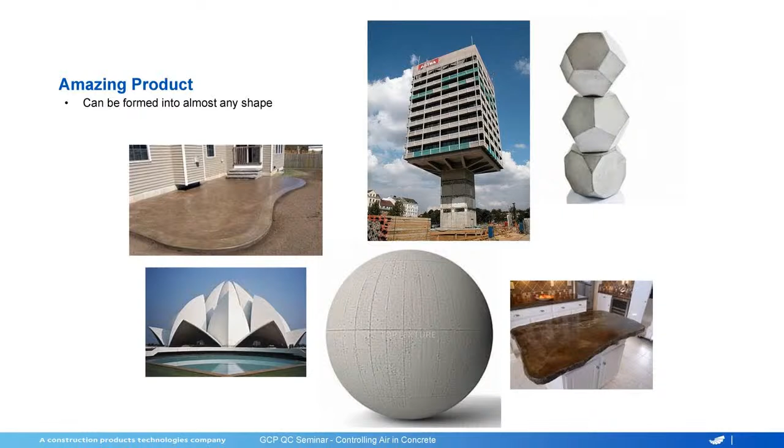So it's an amazing product, amazing material. We can do a lot with it. And part of that is to make it durable. So why do we want air entrained concrete? It's for durability. So how do we get that?

Well, we have to start with good aggregates - and again, good doesn't necessarily mean good for entraining air. Durable aggregates is maybe a better word to use. We're going to have portland cement, and a number of other pozzolans that could be available, and we're seeing more of those on the market. Some of you may have gone to IL Cement recently, and that's offered some other challenges with entraining air and keeping air. And then we have the water, and of course our source of surfactants.

We don't use Joy dishwashing liquid, but they are similar families.

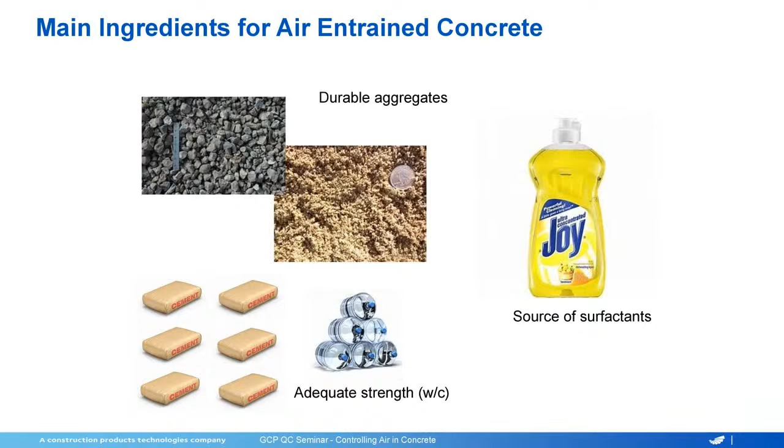So one thing about air entrainment - it's not a foaming agent. If you put air entrainment into your concrete, you're not getting air until you mix that concrete. We're going to talk a little bit about mixers and how they impact the air, but if we don't mix it, we're not getting it. Just like when you wash dishes at home, you put the Joy into the sink with water, and until you get some agitation, until you stir the water, you don't get the foam. It's the same with air entrainment - you have to have mixing.

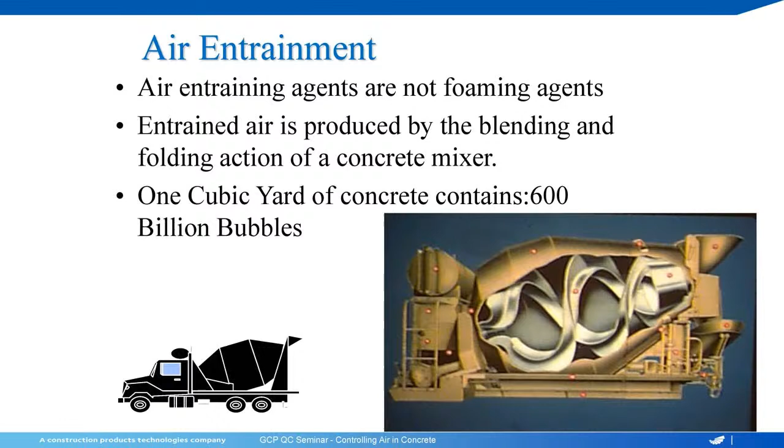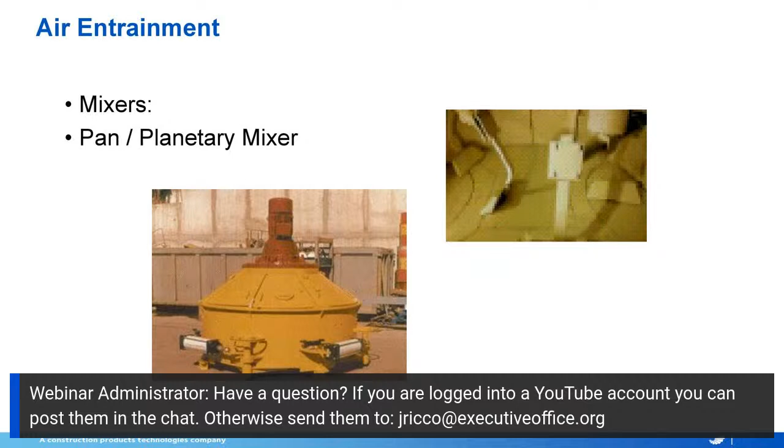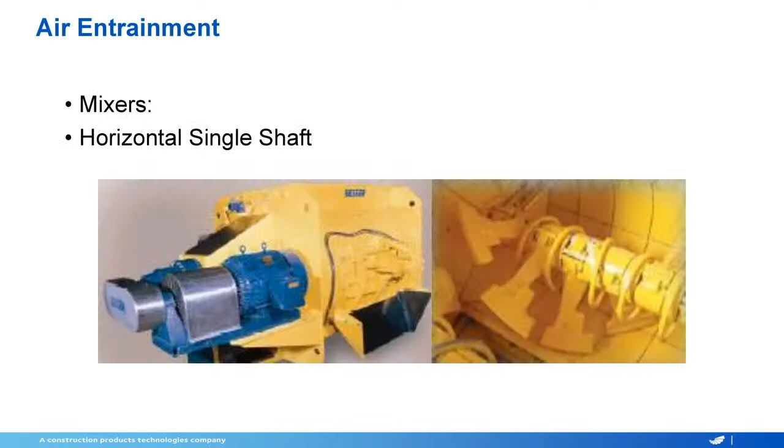So there are a number of different mixers that we can use. Some of you guys use the drum mixers, which are stationary. Some use ready mix trucks to move the concrete out to the forms. We have planetary mixers, we have pan mixers, we have these ribbon mixers - I don't see as much of these anymore as I used to. We have the single shaft and the twin shaft mixers.

And all of these will take the same materials, same amounts of material, same amount of air entraining agent, and give you different air contents. And that's just because the mixing action is different. For example, it would typically take more air in a pan mixer to get the air you need than it would in a twin shaft mixer or a drum mixer, just because the mixing action is different.

So if you change mixers, be prepared to do some testing with the air. If you get a new mixer, get a new liner, install new blades - any of those things are going to impact the air. If you have buildup on the mixer, if you have worn blades, if you have gaps between the blades and the body of the mixer, all those things are going to play a huge role in how much air you get and how long it takes to get there.

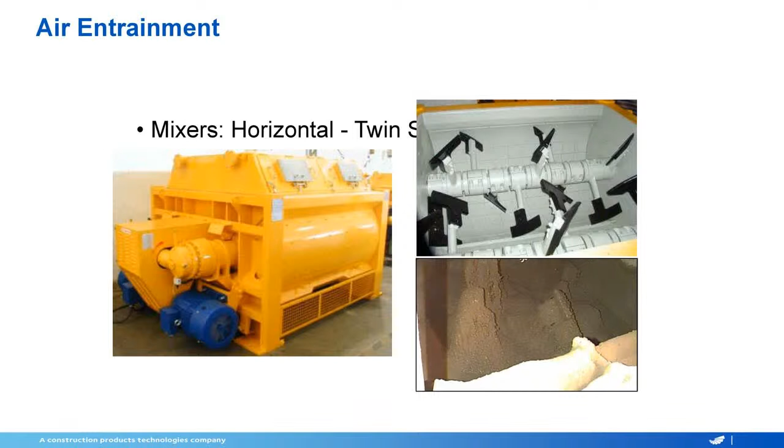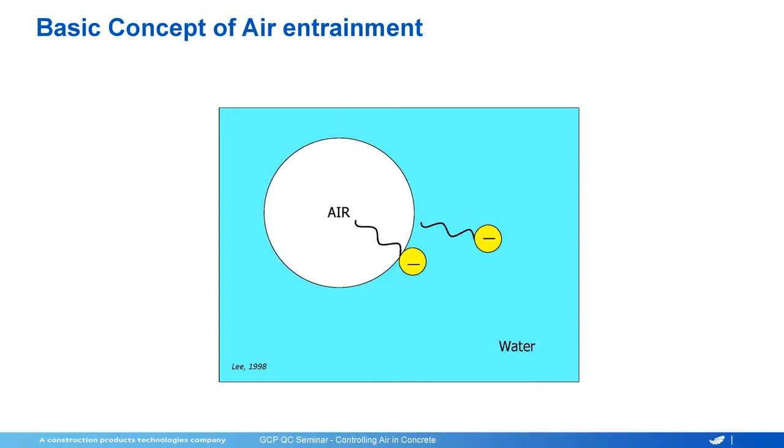So air entraining agents, they're pretty simple materials. They really do one thing, and that's take the bubbles that are created when you're mixing the concrete, and they turn those bubbles, those bigger bubbles, into well-spaced small bubbles. And the reason they do that is you have one end of that surfactant that likes water, and you have another end that doesn't like water. So what happens is you get the tail sticking into the air, the head sticking into the water, and that makes that bubble much tougher than the bubble that would be there without the air entrainment.

So when you mix concrete, you're always generating some air. That air is mostly going to go away as soon as you stop mixing. When you put the air entrainment in there, it stabilizes those bubbles that are created during mixing, and they don't go away. Now some of them will obviously dissipate over time - the bigger bubbles will tend to come out quickly, and we're going to talk about that a little more later.

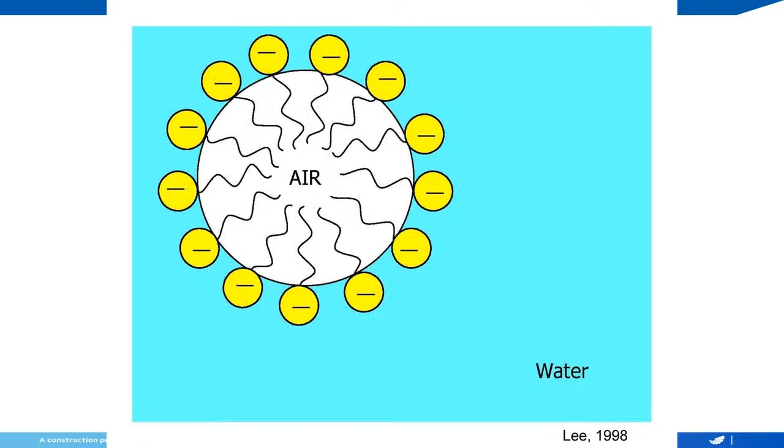So then you'll see, again, we're getting more of these molecules around this bubble. We're getting more bubbles - I'm going to go through this fairly quickly. And then you'll see that you'll get the aggregate. You have the cement.

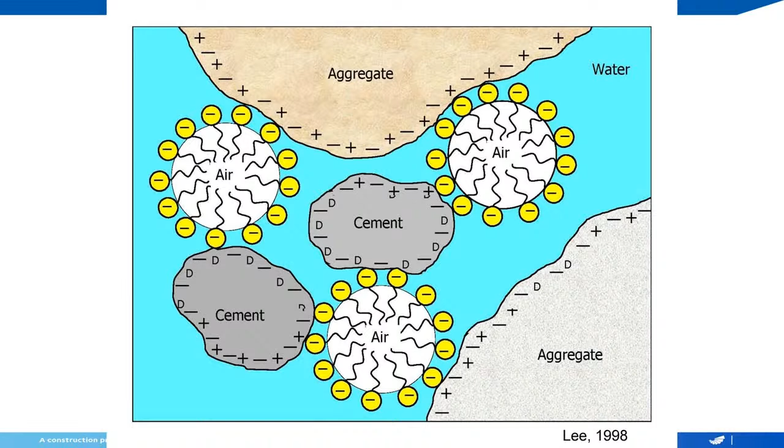And then you've got the water, you've got all these materials, and air needs a really stable home life. So for air to survive, for the air to build and then to stay stable, it needs a stable home life. And we'll talk more about individual aggregate materials later, but that whole mortar phase of the mix, that material passing the number 8, that's where the air lives, and in particular those areas between the 30 and the 100 sieve. So we need that material in there to give that air a stable place to live. The other thing that impacts that, again, that we'll talk about later, is the rheology of this mix. And I'm sure some of you are doing self-consolidating concrete, and that presents its own set of challenges.

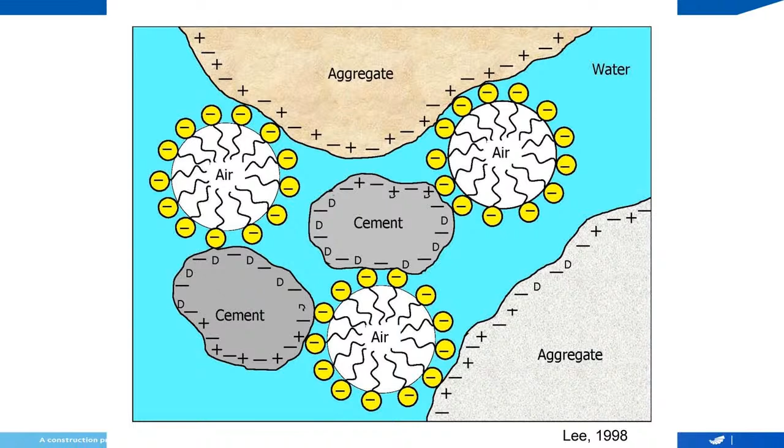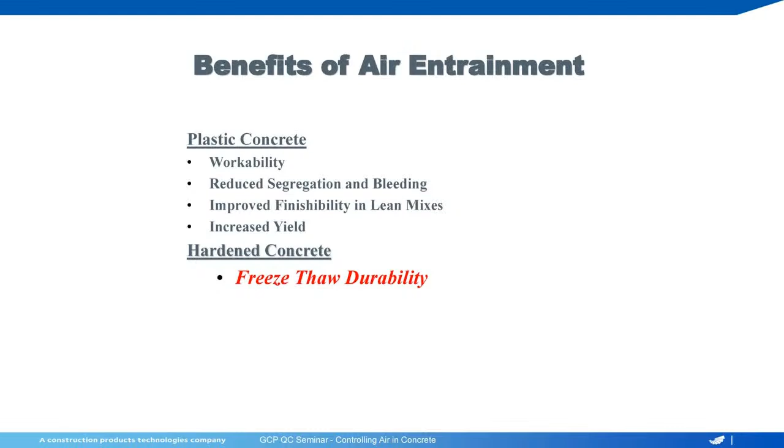Okay, so benefits of air - obviously workability is a side benefit of that. You can get less segregation and less bleeding with air because those channels are now disconnected because you've got the air bubbles in between, so that water's got to work harder to bleed out. You do get better finishability with low powder content mixes. If you have high powder content mixes, a lot of air can cause it to behave a little bit sticky. Of course, we get more yield out of the same batch of concrete when you have air in it. And then the main reason we use air is for freeze-thaw durability.

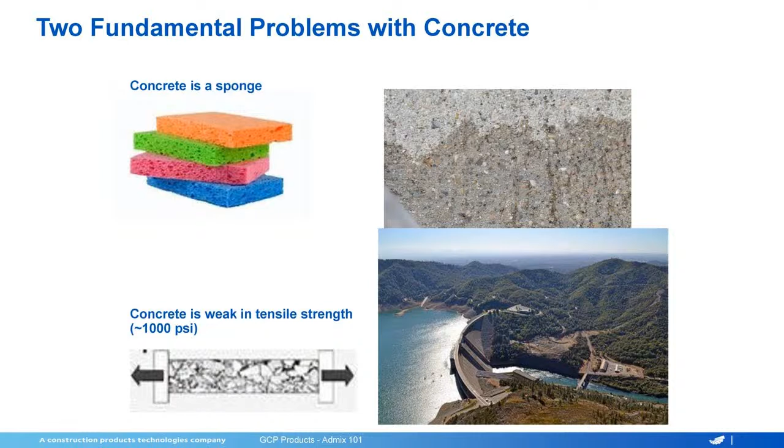Okay, so concrete is a great product, as we mentioned. However, it is a sponge. It is not waterproof unless you do something to make it so. And it's also weak in tensile strength. So we have a material that will absorb water, allow water in. It's weak in tensile strength.

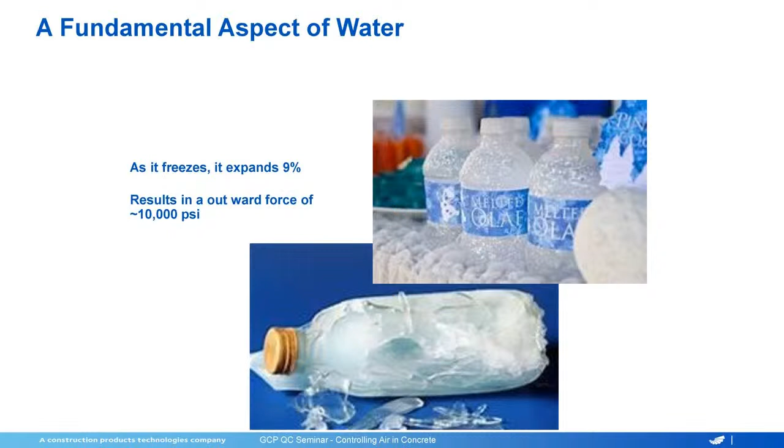And then, as we all know, water expands when it freezes, and it expands about 9%. So it's going to grow, and the outward force is at about 10,000 PSI. So it's a lot of force. And again, that's internal, so it's tensile. So our concrete is not able to withstand that. So the concrete gets wet. It can take it for a little while, but after repeated cycles of freezing and thawing, it will fail if it's not properly air entrained. And there's some other things that go into freeze-thaw durability that we're not going to spend a lot of time on here today.

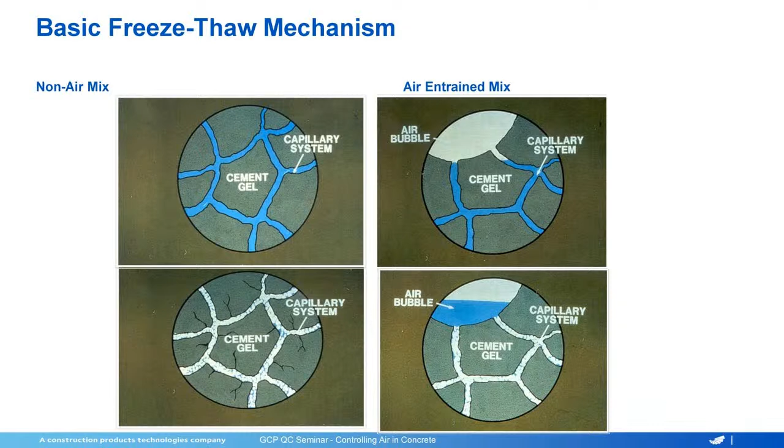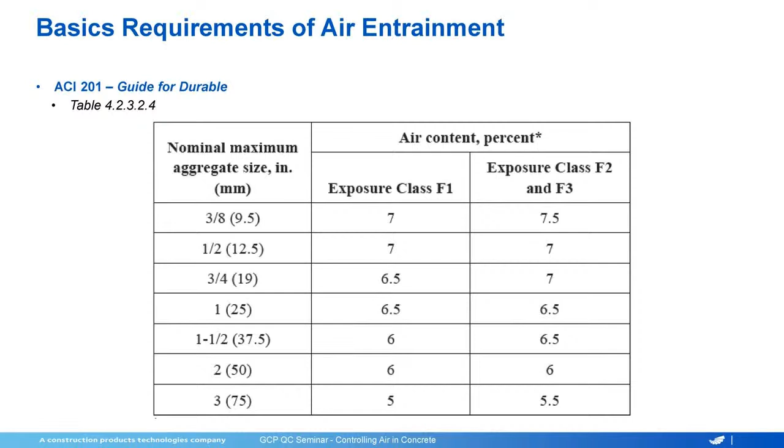Again, air entrainment's been around since the 1930s, discovered accidentally by a forerunner to the GCP business in Cambridge, Mass. Okay, air entrainment - now this is out of ACI. You will see not just this specification, but engineers will write their own specifications, and it may or may not coincide with this. But essentially, as you get lower in aggregate size, you're going to need more air for protection. And it's not just the percentage of air, it's the size of the air, and we're going to get into that as well.

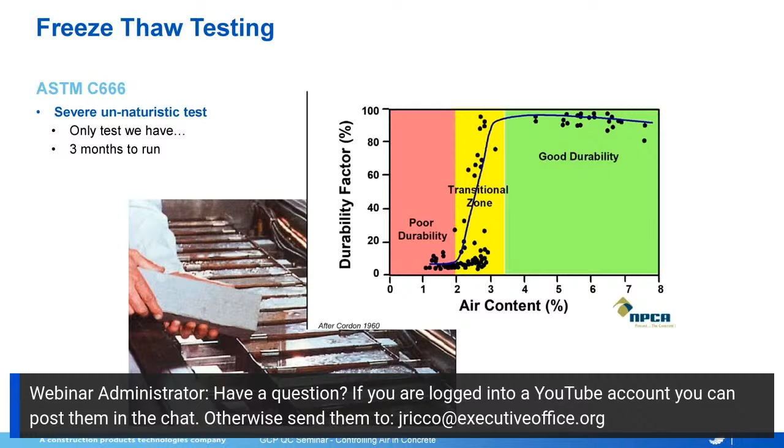So C666 is a very severe test, but it's the only test we have. It takes about 90 days to run because you're cycling through 300 cycles of freezing and thawing. What you'll see is air content's low, and you're almost always going to fail freeze thaw. However, with some very good concrete mixes and very good air systems, we can see good durable concrete at 3% air. We've seen some of that - very low water cement ratio mixes with some very good 3% air can survive that. Don't see that often. Typically what we're looking for is up in that 4+% with low water cement ratio as well.

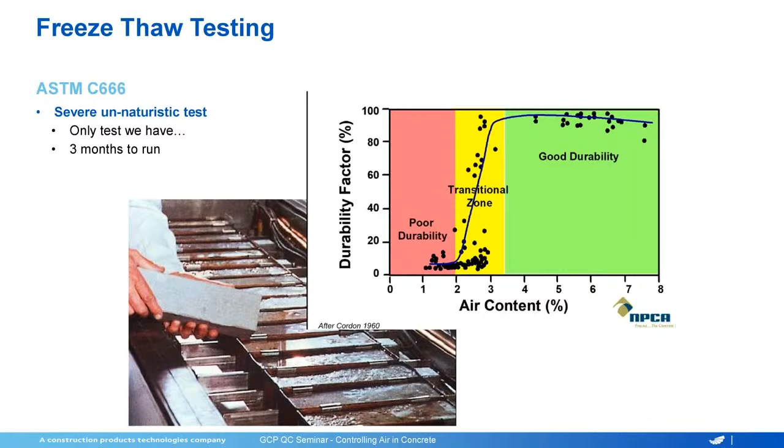Test for air entrainment - now I'm going to get on a hobby horse here for a bit. The chase indicator is not a test. However, if you are having difficulty having consistent air entrainment, it is a good tool to use to do a quick test on each batch that you make. Very simple test to run. It will give you an indication of what the air is. Obviously, you're only testing the mortar in this test, so it's not going to give you as accurate a reading as the roller meter or the pressure meter, but it is a really good test to run.

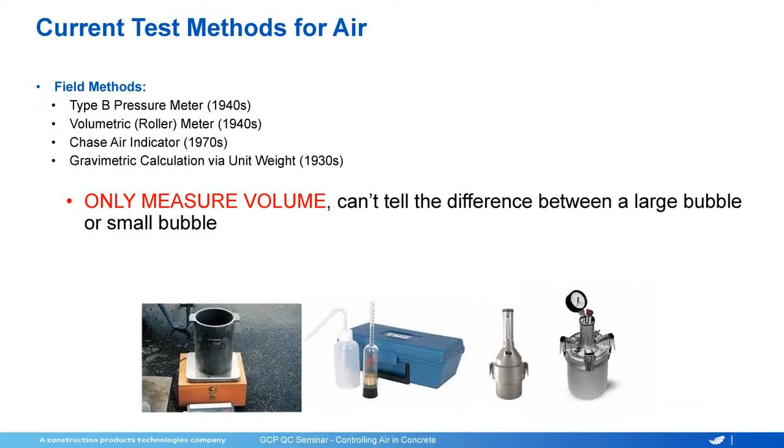And this only tells you the air content - it doesn't tell you whether it's a large bubble or a small bubble. The other thing I would suggest is that anytime you're doing any testing, run the unit weight. If you have the air content and the unit weight, you can learn a lot about your mix, whether you're having trouble with air or not. So it's my suggestion that you always run unit weight when you're testing concrete.

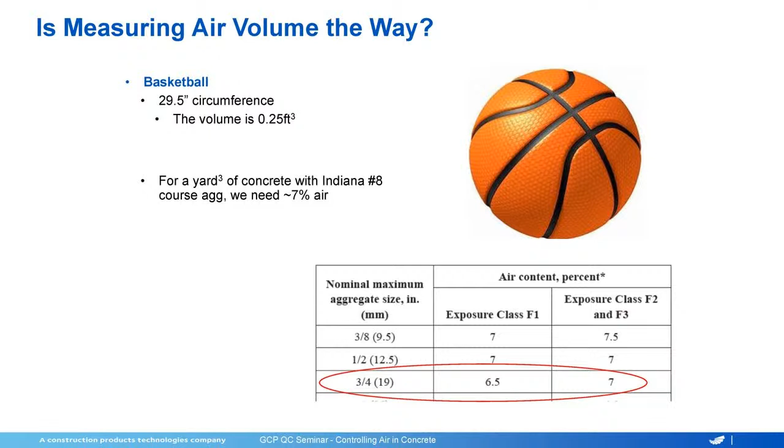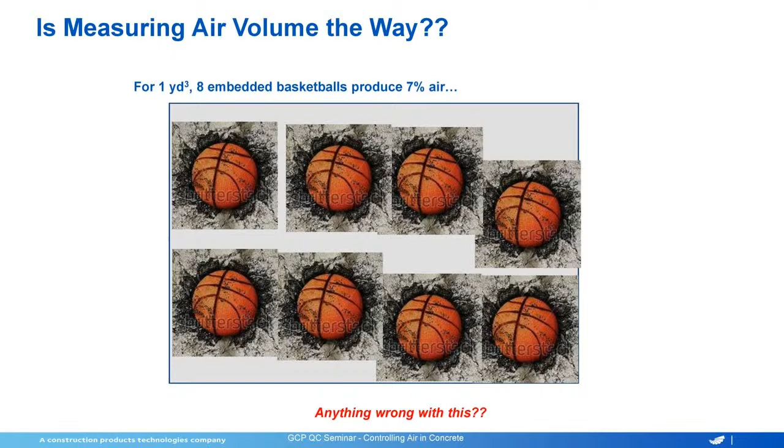Okay, so air voids - if we have a basketball and we need 7% air, a basketball's air volume is about 0.25 cubic feet. So in this example, if I need 7% air, I can put about 8 basketballs into the concrete, and I'd have 7% air in a yard of concrete. Now first of all, it'd be a silly idea. Secondly, all these would be way too big to offer any protection for the concrete. So just to give you an idea of how much air we're talking about, that's what this looks like. So what we need to do is take these big bubbles and change them into small bubbles, and that's what the air entrain materials do - taking these big bubbles generated when we mix the concrete and turning them into lots of very small bubbles.

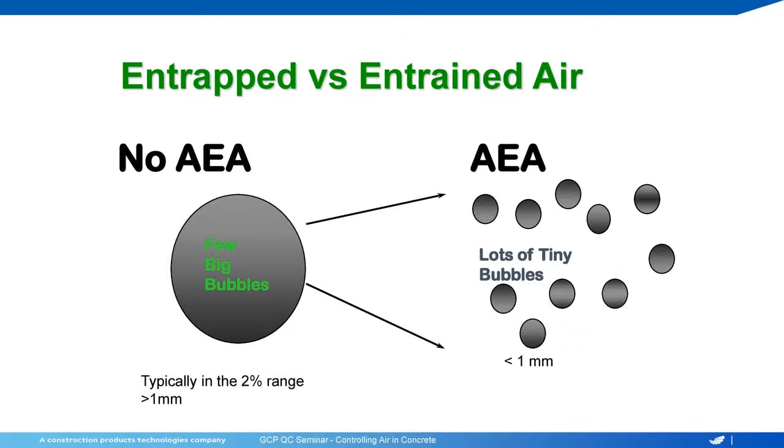So just a quick note - when you're doing hardened air, the polish is key to getting good results. If you're getting a polish on your concrete where it shows the air voids with raveling or ragged edges, you're not going to get an appropriate reading on the air void. That's just a side note.

Spacing factor, again, typically less than 0.008 is the number that we see specified if air void is specified. And that's basically half the distance between two air voids - that's what the 0.008 represents. So not very far.

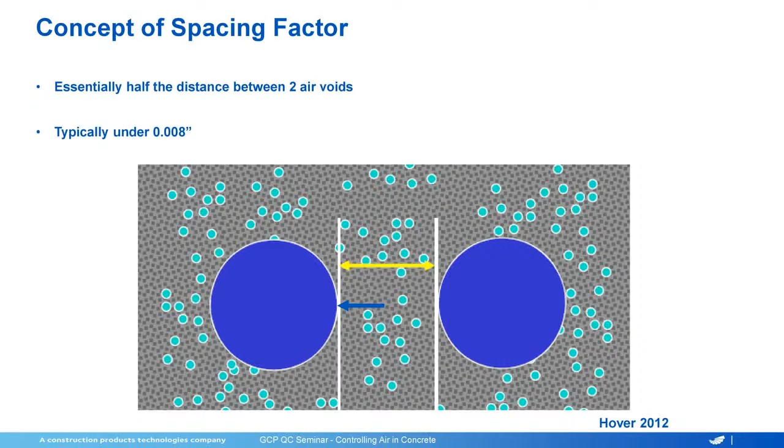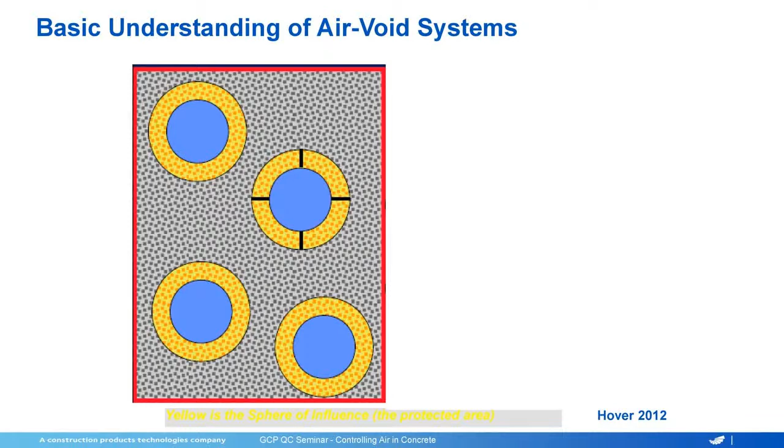Okay, so here we have these air voids again, and we're looking at some that are spaced out, not as much as we'd like. So we want to measure these, and the way we measure these is with a microscope - that's the traditional way to do this, ASTM C457. And linear traverse just means someone is reading this line, bubble on, bubble off, when they see a bubble. They're using that to count the number of bubbles or the percentage of air, the spacing factor of the bubbles, and the size of the bubbles.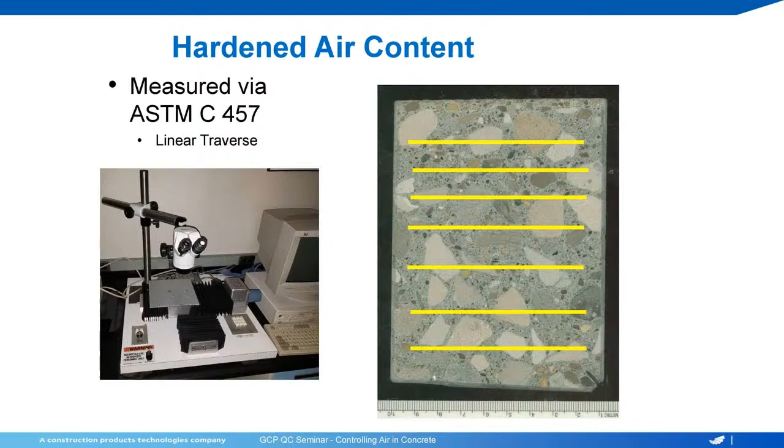Now, fortunately, we can do that in a different way now. We can use a computer to do this. So we do the same polish, blacken the surface, fill the voids with a white powder, and then put that under a computer with a camera, and it does the reading for us.

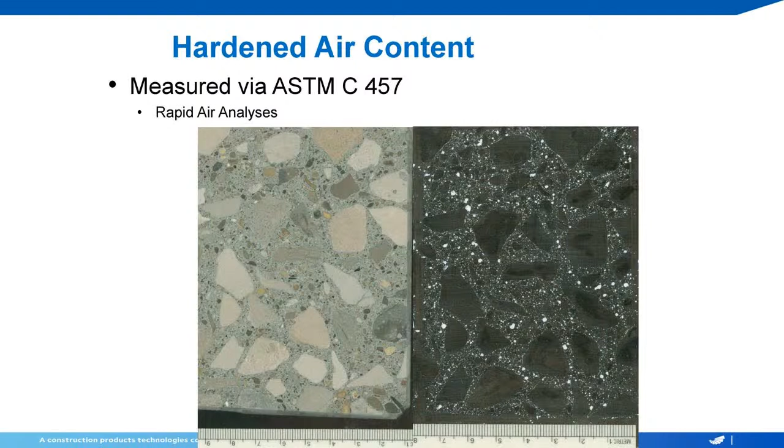So you can see here the different size bubbles in white. Again, some of them are entrapped, some are entrained, and the very small bubbles that you see in here. It may be hard for us to pick these up, but the computer does a really good job of doing that.

We get much more consistent results with this test. Void frequency, that's how often the voids occur. Specific surface is the indication of the bubble size, and then the void chord length is the diameter of the bubbles. So here we're just seeing a distribution of those bubbles, and the ones on the very small end is what we're looking for to get us very good freeze-thaw protection.

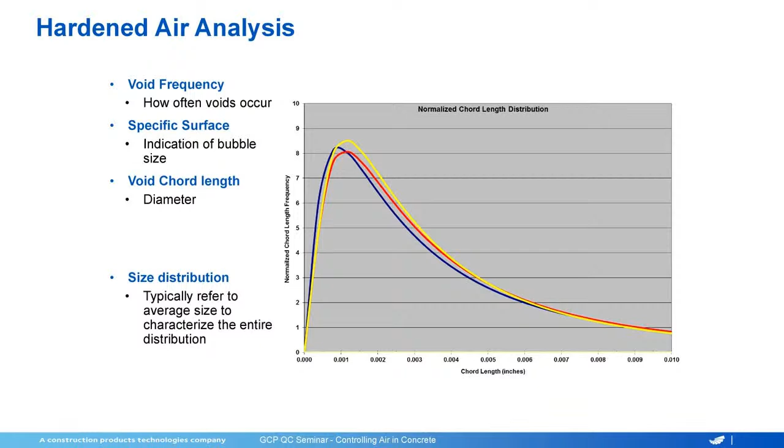In reality, we can get over this 0.008 and still have good freeze-thaw protection, but we're going to need more bubbles to do that. This is just an example of different readings with different air entrainments at different water cement ratios. So same mix, different materials, and we're getting different results. Again, you can see that spacing factor often goes along with how much air we get. So the more air we get, we tend to get smaller bubbles.

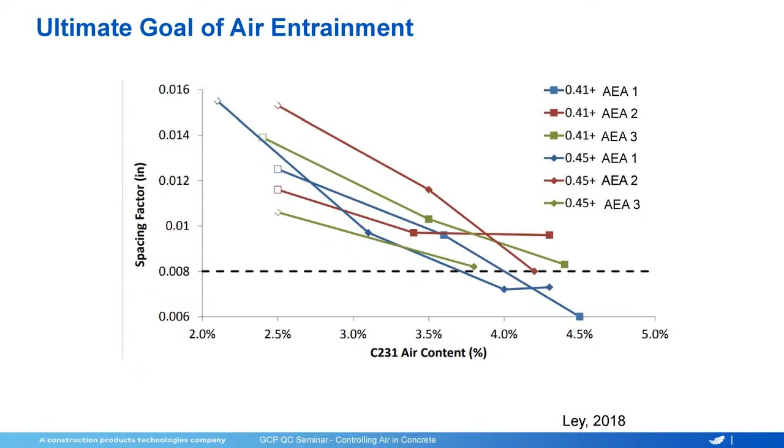Okay, so what in the world do we do to control this air in our concrete? Well, a couple things that we need to think about. One is all these materials that go into the mix. The more consistent our materials going into the mix, the better the control is going to be of the air. The one key, if I could say there is one key to controlling or managing air in a consistent way, is that the materials going into the concrete are consistent.

So what do I mean by that? For example, if you're changing cement sources on a regular basis, you're going to struggle with controlling your air. Within the cement, there are some things that we'll talk about in a bit that you can monitor to tell you if you're going to struggle with air or not.

Slump needs to be consistent. Mixing time needs to be consistent. If you are using mixer trucks to deliver the concrete, how fast that drum is turning needs to be consistent. Consistency in everything we do, from the materials we use to the practices we have, that's the key to doing that.

So the other thing is the rheology of the mix. Now, we can have a 7-inch slump that's easy to move, has the right amount of water and admixture combination in it, or we can have a 7-inch slump that's really hard to move, kind of like the Play-Doh here. There, it holds its shape, doesn't move. We've got to use some energy to make it move. So not every 7-inch slump is the same.

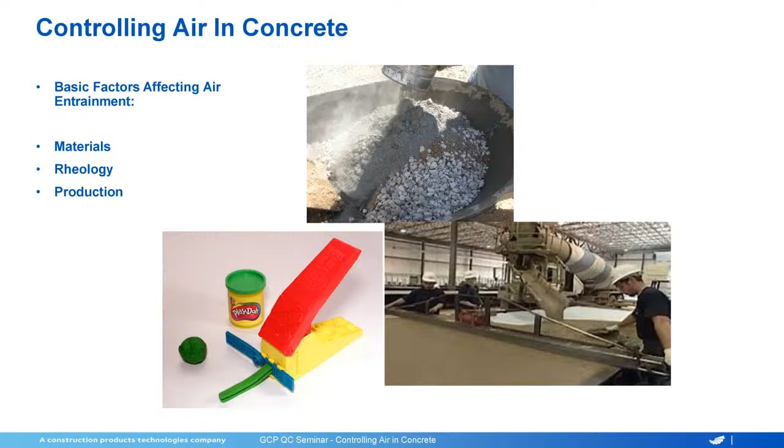And I know what you're thinking, right? Easy to say, hard to do. Totally agree with that. So looking at the materials, if someone asks me what in the mix affects air, and I'm sure if you've been in the concrete industry more than a minute, you know that everything, literally everything in the mix can affect the air entrainment.

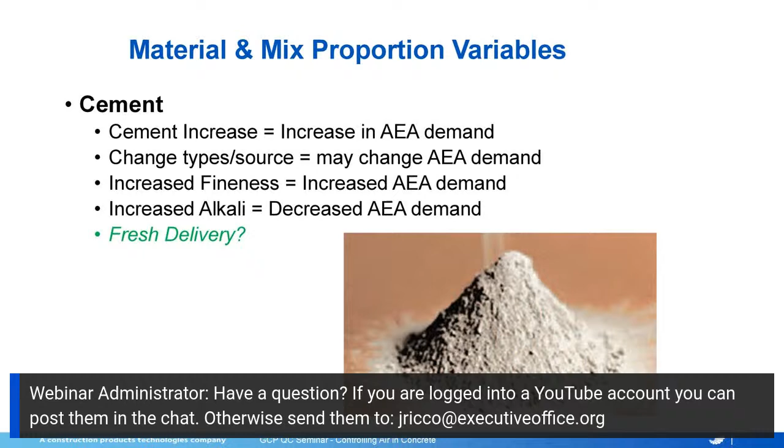So if you go up on the cement content, you likely will need to increase your air entraining agent. If you change the source, you're likely going to need to adjust your air entraining agent. If you increase the fineness, you will likely need more air entrainment. One thing we saw with some of the 1L cements is as they switched from Type I/II to IL, they got finer, so the fineness went up. A lot of that was the limestone portion being fine, but still we saw that it was a bit more difficult to get air in some of those cases because of the fineness.

Some of that was due to the fact that the water demand went up. And so as the water demand went up, we were using more admixture, less water, and it was harder to get air entrainment.

One thing you can look at on a mill cert is the blaine, to see how fine it is. You can also look at the 325. If the blaine's changing and the 325 is not, there could be something going on with really fine particles. Then there's the alkalis. The higher the alkali of a given source of cement, the easier it is to entrain air. So if my alkali is at 0.4 and a month later it's up to 0.6 or 0.7, it's going to be a lot easier to get air into that concrete. That's one of the things to look out for.

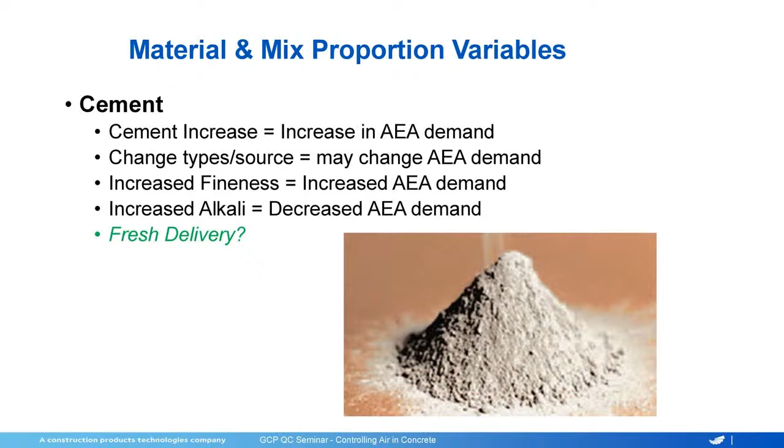Fly ash, and I know that in architectural plants it's not always used, but fly ash typically causes the air entrainment dosage to be increased. That can be because of the fineness, or because of the LOI. If you have a higher LOI, or a fluctuating LOI, it can be a real challenge to get consistent air. The LOI, the carbon in the fly ash, will act as a sponge and absorb that air entraining agent, so it's not available to help stabilize those bubbles. The higher that number is, the more difficult it is to get consistent air. Type F ashes do tend to have a higher AEA demand, typically because they have a higher LOI than the type Cs.

You can use the foam index test as a quality tool to check your incoming fly ash samples. It's a very easy test to run, doesn't require a lot of training. If anybody's interested, you could email me at any time and I can send you how to do that, but it is something that's doable.

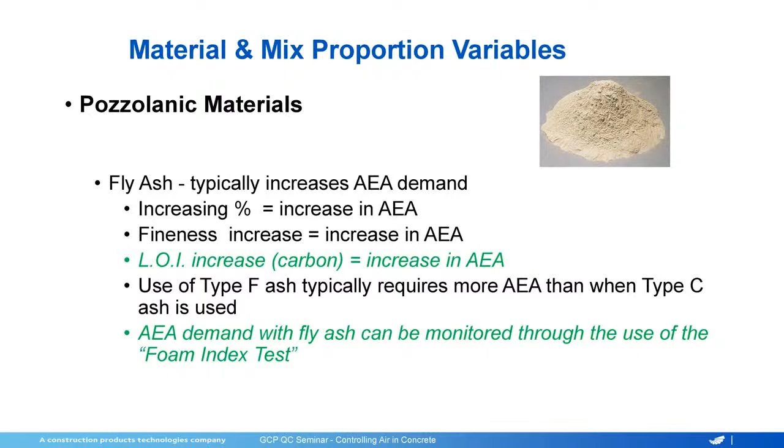Silica fume typically does cause your air entrainment dosage to go up. However, in some cases where you're using silica fume in a self-consolidating concrete mix, and you have a mix that's on the edge of segregation, so it's good, it's not segregating but it's almost there, those can be difficult to maintain air content. You can get the air, but it comes out pretty quickly. In some of those mixes, if you use silica fume, it stabilizes that, stops that segregation, and actually will bring your air entrainment dosage down.

It's not typically what happens, but again, if the silica fume is making that mix more cohesive, remember we talked about needing a stable home life for the air bubbles. That's what we mean by that, that we don't need the mix to be excessively bleeding. And I know that's a terrible choice of words, because what is excessive? I can't define it, but I know it when I see it.

Then those mixes are going to have a hard time keeping air in the mix. And that's why sometimes with architectural concrete, we're using aggregates that are not friendly with air, and we struggle to control the air with those mixes.

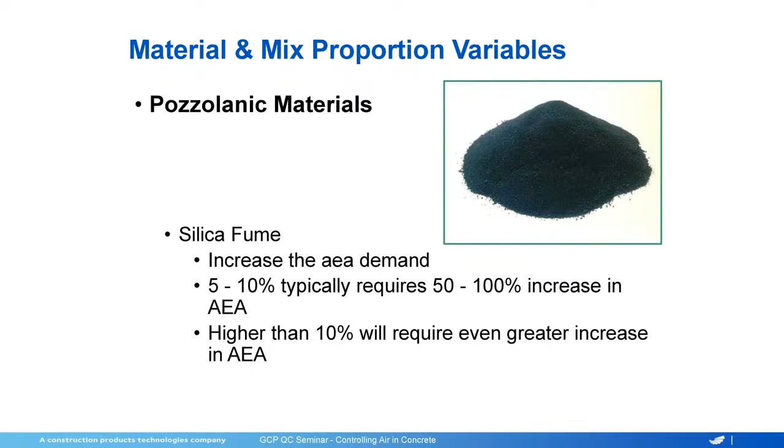Okay, aggregates. Not all rocks are the same. And yeah, I know it's a bad pun, but it's the best one I had. So they're not all the same.

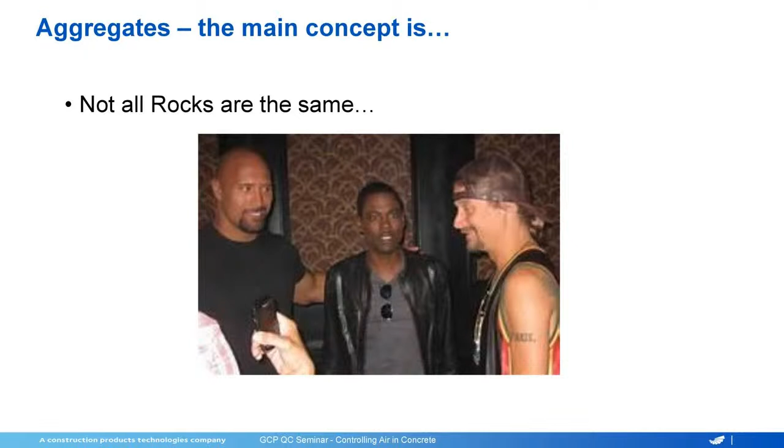Again, consistency in your aggregates and managing your stockpiles is key. If you have a loader operator managing the stockpile, someone that's doing a really good job can make life much easier with getting air than someone that's not.

So backstacking your stockpiles, not digging too low in the stockpile, not digging in one spot for the entire day, because then you tend to start segregating the stockpiles. What we want is a consistent gradation delivered to the batch plant. While sometimes we have consistent gradations delivered to our stockpiles, our handling practices make it difficult to keep that consistent going from the stockpile to the batch plant. So we want that to be consistent.

Cleanliness. If the guy that's managing those stockpiles can pay attention, note any clay balls or any coatings on the aggregate as those are happening, and you see a change, you're almost always going to see your air entrainment dosage increase because of those fine materials. And you likely will also see an increase in water demand, so you're going to get hit with a double whammy with doing that.

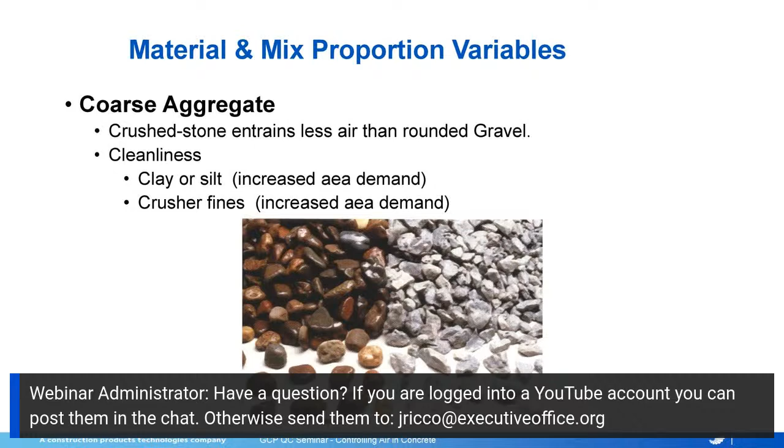So for the coarse aggregate, moving from a larger stone to a smaller stone, I'm going to need less air entrainment, higher air for protection, right? Easier to get air with smaller stone. I'm going to need less air entrainment with rounded stone.

And if I can be consistent with the material that I'm actually putting in the plant, it would be a good idea to conduct plant audits. If you're not familiar with what that looks like, I'm happy to help with that. But plant audits to make sure that each step of the process is being handled consistently is going to make a big difference in your ability to control the air consistently.

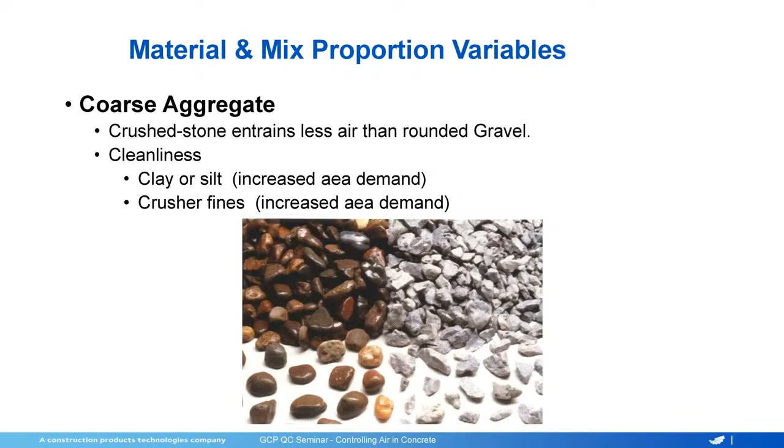Fine aggregate, and this is really, if I had to say which material can I control to make the biggest impact on the air, I would say if you're dealing with a decent fly ash, it's going to be the sand. If you have a crappy fly ash where the carbon's all over the place, then it's going to be the fly ash. In either case, a consistent sand gradation is going to be a huge help.

Now, yes, if you're using natural sand, it's easier to get air than it is with manufactured sand. But in both cases, if you can have consistent gradations, that is the key to having the right air entrainment.

You can use the FM of your sand as a tool to track consistency of the material, but you can't just look at that alone. You're going to have to be able to look at each sieve size and make sure that it's being consistent.

And what you will likely find is that you need a much tighter range of control than what ASTM allows. So, for instance, one sieve in ASTM has a 10 to 30 range. That's a huge range. So if you're at 10, you're going to struggle to get air. If you're at 30, and this is the 50 sieve, then you're going to have no issue getting air.

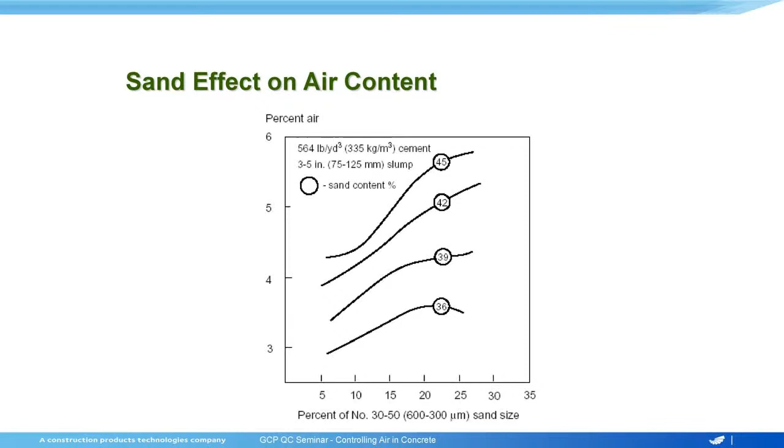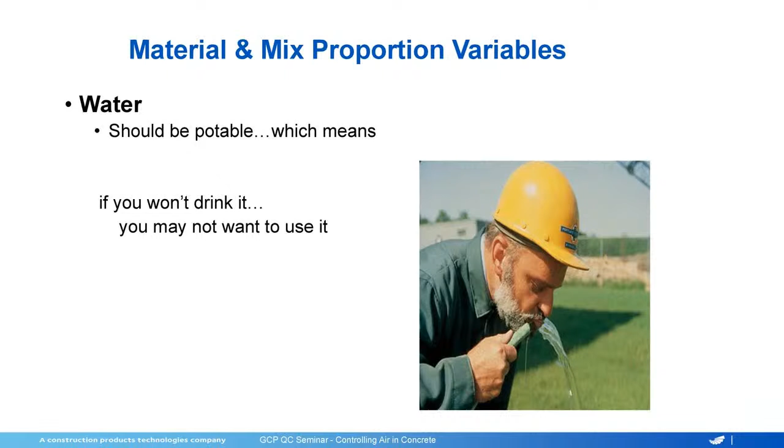Water needs to be potable, which means if you won't drink it, you may not want to use it. There are a lot of producers that use recycled water, wash water, those kinds of things. We actually have some producers drawing water out of a canal, and they can do that successfully as long as it's consistent. Now, if you're collecting water in your plant and you've got oils and stuff running off into the water, that can wreak havoc one way or another with your air entrainment. So again, like all the other ingredients we're talking about, being consistent with the water is key - not just the composition of the water, but how much water I'm using in the mix.

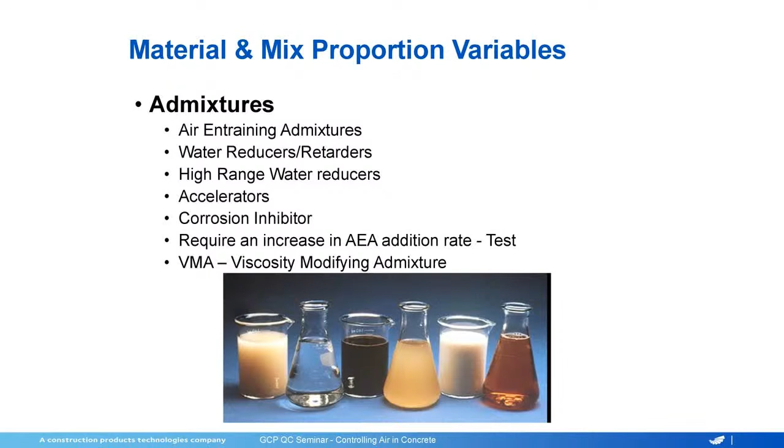Okay, admixtures, my favorite subject. All of these products are going to have an impact on air. Obviously the air entraining admixtures, but water reducers, retarders, high range water reducers, accelerators, corrosion inhibitors - all of these are going to have an impact on the amount of air that we get. So I'm going to jump into this. I'm going to struggle to finish all of these, so I'll go through some of this quicker than others. If you have questions, hopefully I can pick those up.

So there are different chemistries. Vinsol resin, the original air entrainment, doesn't need as much mixing, gives you a decent bubble. Tall oils give you a smaller, tougher bubble, and take a little longer to mix.

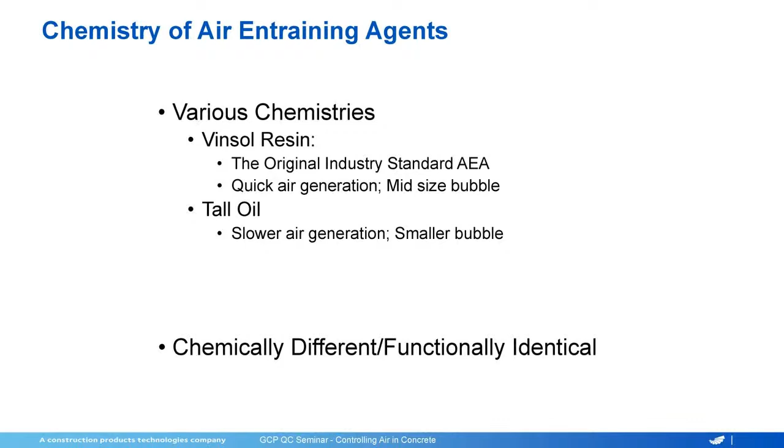And one is not necessarily better than the other, but they do behave differently as far as getting to the air you're looking for. They're chemically different, do the same things, but one's going to need more mixing than the other.

Water reducers - if you're using a lignin-based water reducer, your air entrainment requirement is going to go down. Lignins can entrain some air on their own, typically not great air, but if you're using a lignin-based water reducer, they will certainly reduce the amount of air entrainment that you need.

Some of the sugars, carbohydrates, they may reduce it, but may not. And then the gluconates tend to have minimal impact on that.

Calcium chloride can cause you to increase slightly. I don't know that you guys would use a lot of calcium chloride, but they typically don't have a big impact. Now, non-chloride accelerators, yes, typically minimal impact, but if you're using hot water with non-chloride accelerators and trying to get air entrainment, you can struggle. A lot of that's going to come down to dosing sequence. Dosing sequence makes a difference in general, but when you're doing hot water and non-chloride accelerators, it really can have a huge impact on the air.

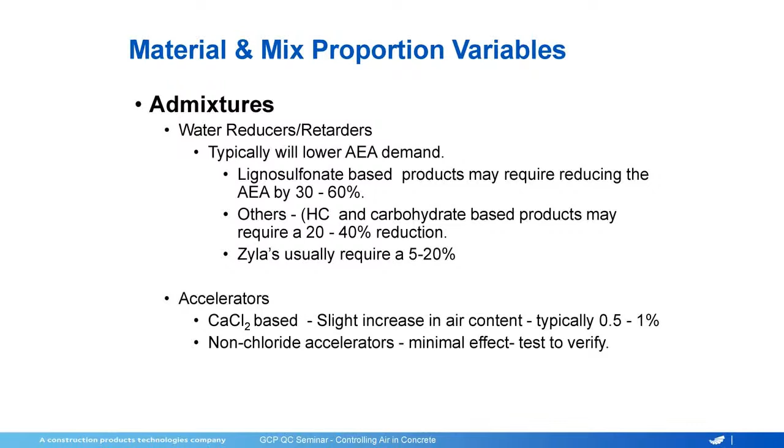High range water reducers - not a lot of naphthalenes and melamines around anymore. They don't impact it too much unless you get the concrete too fluid, and then you're not going to be able to keep the air in there.

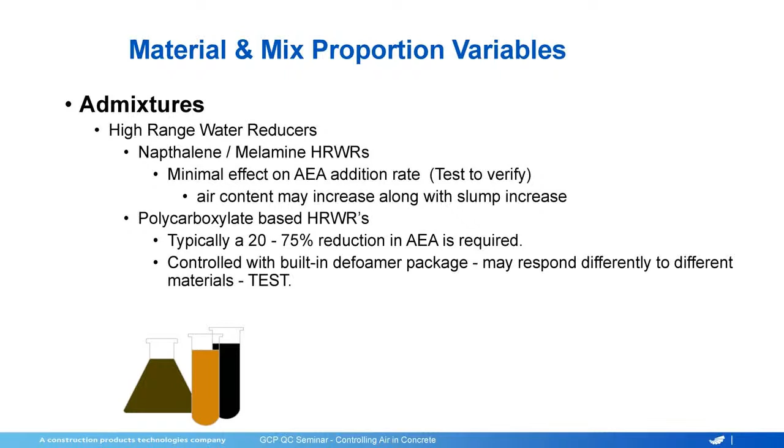Polycarboxylate based high range water reducers all have defoamers in them. They're all different. Typically, you will need less air entrainment when you're using a polycarboxylate admixture, which is probably 99% of the high range water reducers on the market today.

Corrosion inhibitors, like accelerators, can impact it slightly. And again, if you're using a corrosion inhibitor with hot water, that can be an issue.

Shrinkage reducing admixtures can be a bit all over the place. Some of them you cannot get air with, so you would have to be very selective of the shrinkage reducing admixture that you're going to use, and then test to make sure you can get it. Again, don't put the air in at the same time the shrinkage reducer is going in.

Viscosity modifiers can be your friend if you're struggling to get air, especially if you're placing high slump mixes or high flow mixes, and you're having what I'd say is a bit of a witch's brew. You place the concrete in the forms, or in a bucket to deliver it, or you see it in the truck and get that bubbling cauldron effect. Doesn't necessarily mean all the air is coming out, but it does mean that mix is struggling to maintain its stability, and you'll see those mixes tend to be much more difficult to keep the air.

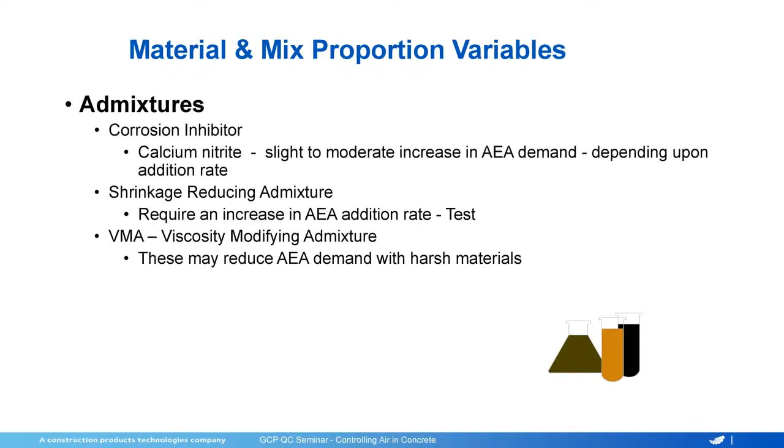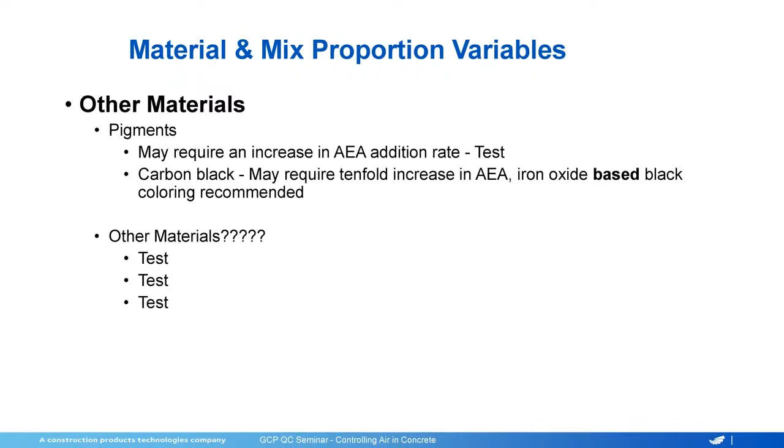Pigments, you're going to be all over the board with pigments. Some of them are not going to impact very much, and some will impact significantly. Carbon black, if you're using that, is going to require a significant increase in air entrainment. For other products on the market, some have much less impact than others. So I'd just say you're going to need to do a lot of testing with colors to find out the right sequence of materials and the dosage you need to get the air you're looking for.

So again, all of these materials can have an impact on air. Having consistent materials, a consistent batching sequence, and a consistent mixing time, that's going to be key. I should have touched on this earlier. I know sometimes in precast we start the mixer and then end up waiting for the bucket or the truck or whatever our transportation is, so we keep that concrete mixing. Many times that extended mixing is either going to cause the air to go up or go down. So the same mixing time, the same sequence, consistent materials, consistent workability levels, both from the rheology aspect and the slump or slump flow aspect, is going to be huge in getting consistent results.

Production, I've been talking about that. Batch size is another thing to consider. If I'm consistently doing 4-yard batches and then I switch to a 2-yard batch, my air content is likely going to go up because I'm getting more efficient mixing.

We've talked about most of these other things, but placing and vibration, if you're required to do in-place hardened air, that's obviously going to make a big difference. So doing that in the right manner - we could do a whole presentation on the proper way to vibrate concrete, which we won't get into here - but throwing it out, fishing, pulling it back, getting too close to the forms, all those things are bad ideas. And I'm sure you guys know that because it's not helpful for the appearance of your concrete either.

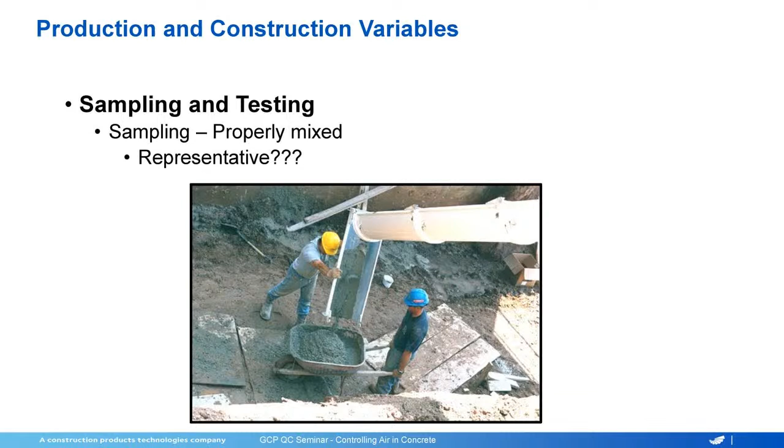Again, another bad picture that doesn't have anything to do with precast - it's just a really bad picture of guys testing inappropriately. Make sure your air meter's calibrated, and I would do that more often than they recommend, just because we work in very difficult environments and we can lose our calibration very easily.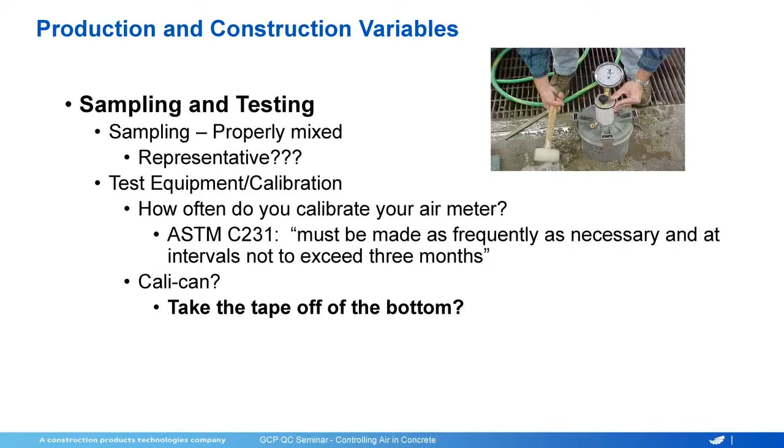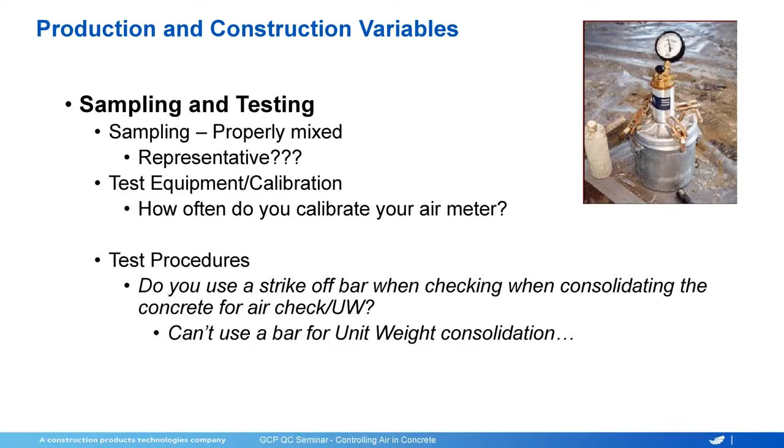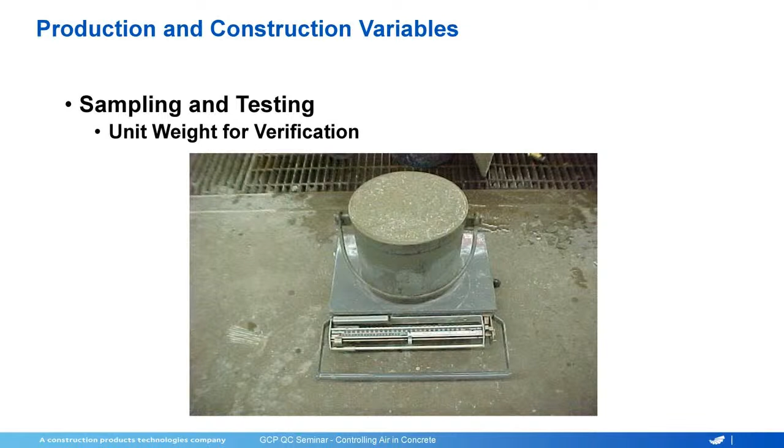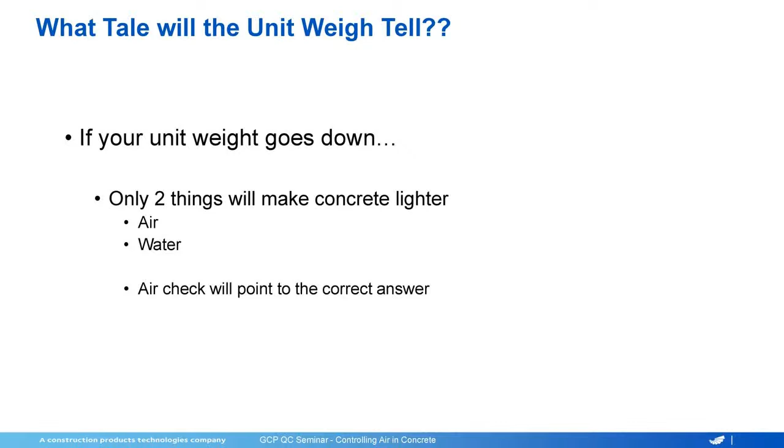Strike off bar, but not when you're doing unit weight - and I know this happens all the time. I think we get some bad numbers on unit weights, and we want to be able to correlate that unit weight with our air content and make sure we're getting the right numbers. I would always run unit weight no matter what I'm testing for. And yes, if the unit weight goes down, there's only two things that will make it lighter: air or water. So if I'm checking the air and checking the unit weight and those two don't match up, if the unit weight is lighter than it should be, then chances are I've got too much water in the mix. I know that's hard to tell sometimes if we're using the right amount of water, but anyway, it's a good test to run and to correlate those two things.

And this is just an example of unit weight correlation. We've also got strength on here. One thing I'll point out is we talk about losing 5% of our strength for each percent increase in air. Our experience is that when you get over 7%, that number changes dramatically.

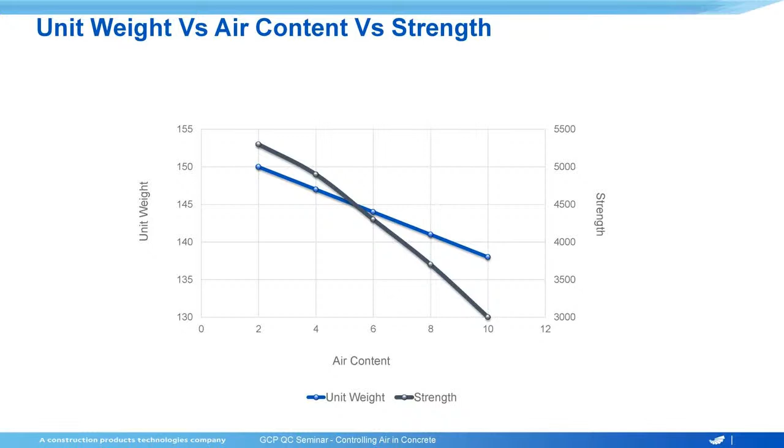If you're fine with 7% air on strength and you go to 8% or 9%, you're going to see a huge drop in strength. So it's not a linear loss of strength from 3 to 6 or 7%, that's pretty linear. But once you get over that number, strength loss is going to go up significantly.

Scales are cheap. I've visited a lot of plants, and I don't see unit weight run as often as I'd like. So it's a really good tool, and I won't hammer on that anymore.

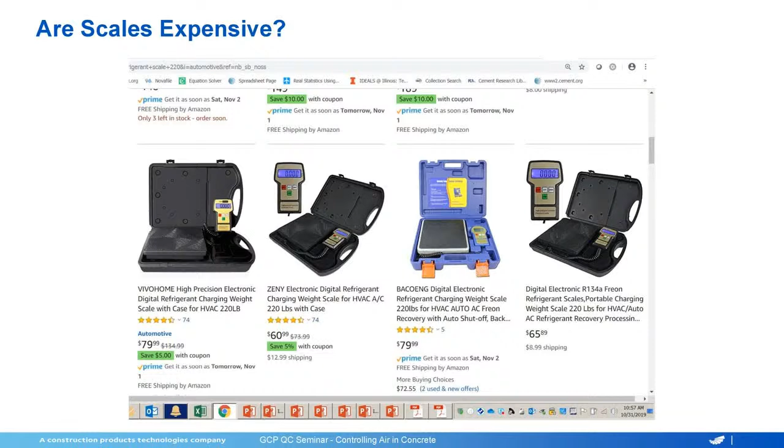I think we've covered that. Yeah, so sampling from a truck, as I mentioned, the speed the drum's turning and how much it's turning are important things.

You don't need to spin it at full charging speed. So 10 to 12 revolutions per minute is ideal for those drum mixers to give the air that we're looking for.

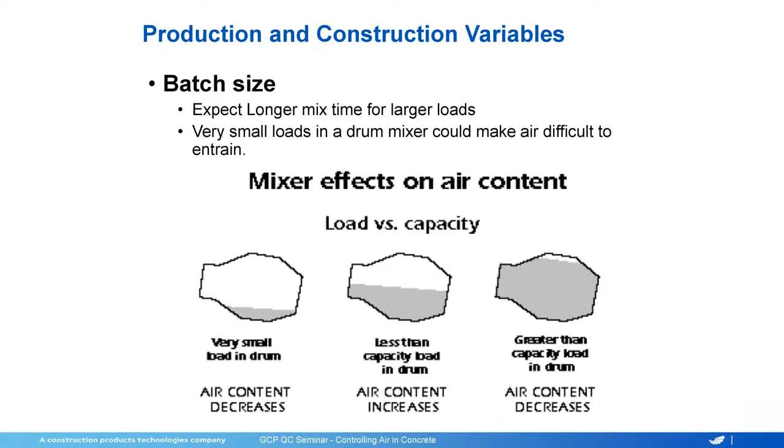Again, we talked about this. If I'm doing less than full loads, I'm going to get more air than if I'm doing full loads - 4 yards versus 2 yards, 6 yards versus 3 yards. It's going to change.

And John, am I running out of time? Well, yeah, you're getting close. You've got about 3 to 4 minutes left. Okay, thank you.

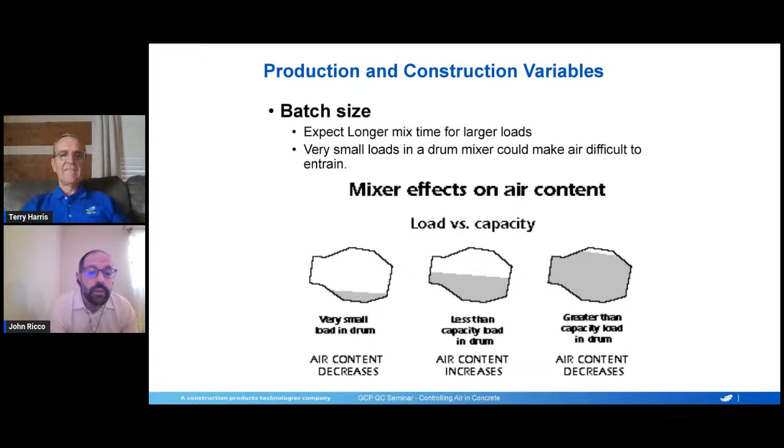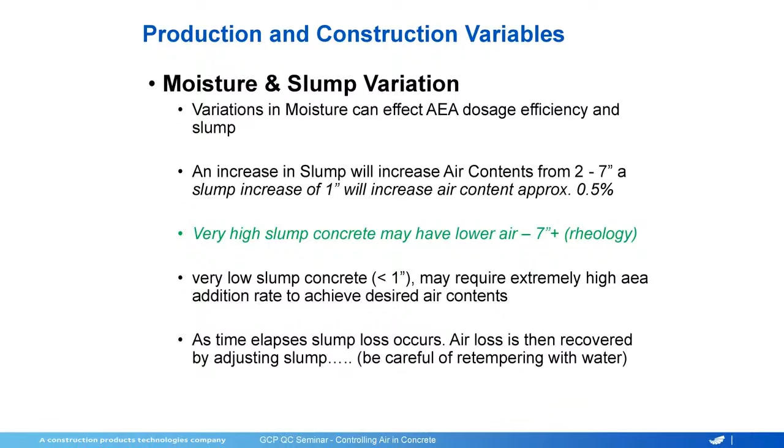I'm going to skip ahead to just a couple of slides that I wanted to cover here. And by the way, I'm famous for never finishing a presentation, so my reputation is intact.

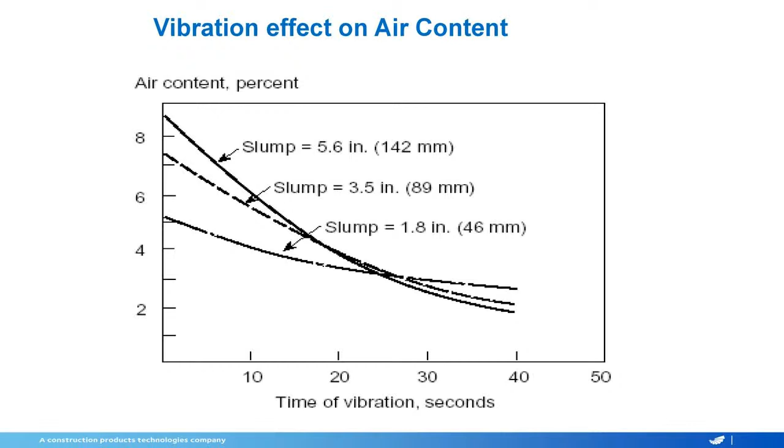So just wanted to talk real quick about the bubbles, right? We talked about big bubbles, small bubbles, and the rheology of the mix. Mixes that are unstable, that are watery - you pull a slump and you can see some water or paste running away.

Those unstable mixes are going to make it very difficult to keep the bubbles in. The bigger the bubble, the easier it is for them to come to the surface. So not all the bubbles leaving are necessarily a bad thing, but those big bubbles leaving are.

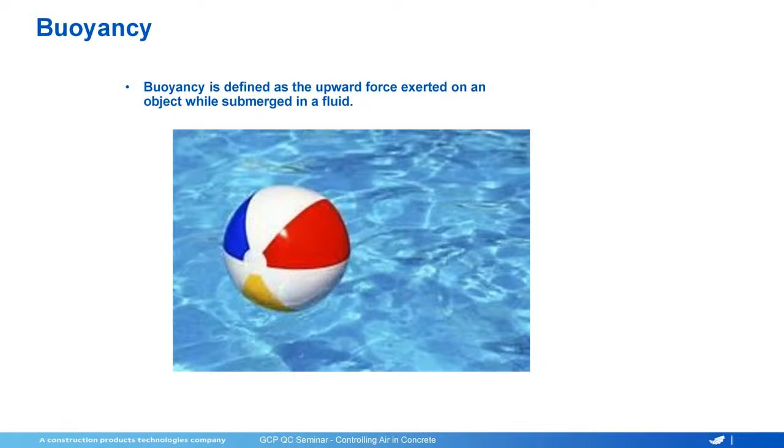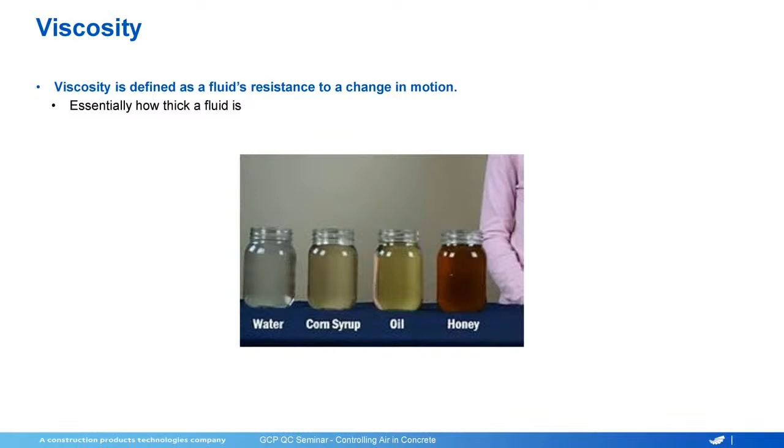And John, I'll stop there and see if there's any questions out there. Yeah, we do have a couple. One popped up here on the YouTube channel: how does an admix that controls efflorescence react with air entrainment? That's a good question.

Typically, you would want to keep those materials added separately. But if the mix is a good mix, we typically don't see a big impact from those efflorescence control admixtures on air content.

All right, very good. And the other one came in through email - we've been talking a lot about UHPC lately, so that's probably what prompted this: how does air entrainment affect, or how is it applicable with, UHPC? That's the question. Yeah, so you typically don't want air in UHPC.

We've worked with a number of producers to develop these mixes. We can get some air unintentionally because of the nature of those mixes, where it's all very small aggregate. And if you get too much VMA or RMA - rheology modifier - in those mixes, we tend to see the air start to creep up.

So I would not want to try to control air in a UHPC mix. And if somebody wants to do that, I'd be interested to see how it turns out - I think it would be a real struggle to do that.